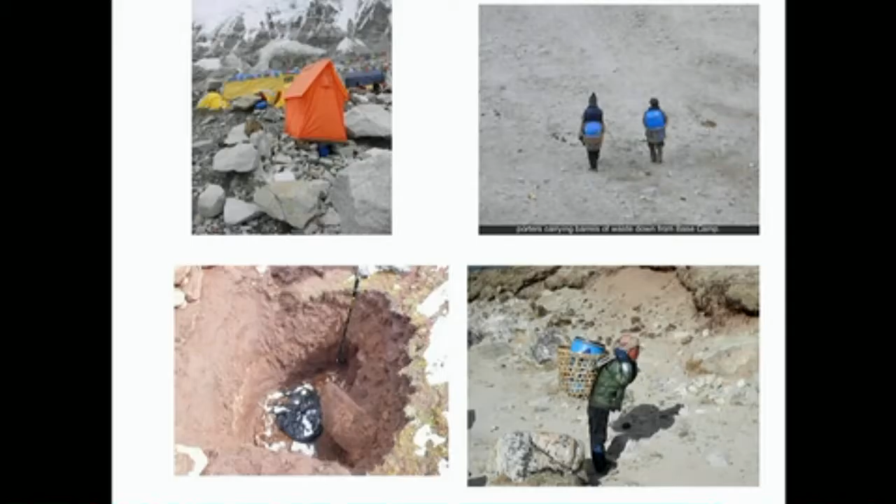unlined pits at Gorak Shep. You can see the ski pole for size, and when it fills up, they cover it up and move on. They've now gotten to the point that they've filled up the space at Gorak Shep. They have no more room, so they move below Gorak Shep.

And it stinks. It will slowly, particularly the human waste, dehydrate because of the cold, so it will shrink. And in those pits I showed you earlier, the dirt falls in, and the yaks can step into it because they're depressed areas.

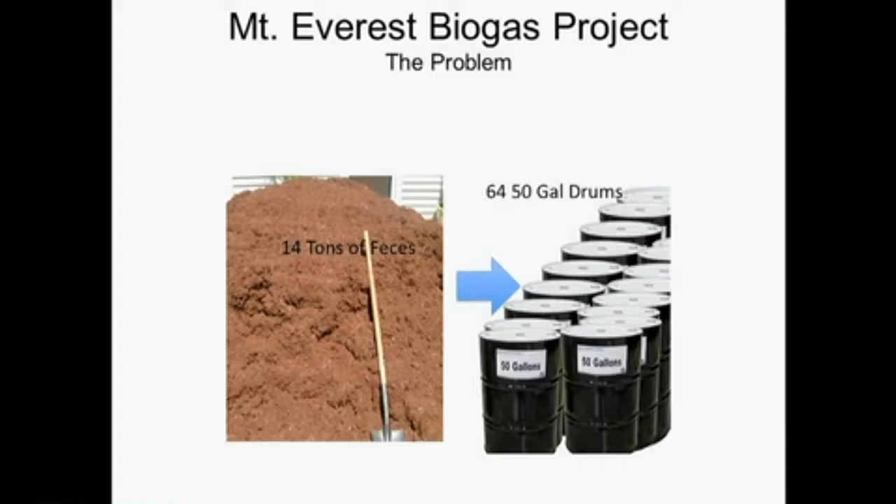So to give you a feel, I can't get my arms, and I don't want to get my arms around 14 tons of human waste every year. 12,000 kilos of human solid waste, not urine, is carried down from base camp and dumped, and that's about 14 tons, so just visualize what that is. I converted that into, that's the equivalent every year of 64 50-gallon barrels. And if you stacked them on top of each other, it'd reach 165 feet in the air.

Another gee whiz, if you fill a room 8 by 8 by 7, I don't even want to visualize a room full of poop, but that's what we're doing. The equivalent of 64 barrels.

So, who are we? And this thing really started. Dan Mazur is a co-founder with me of this. Some of you may know him. He reached notoriety, not that he planned it, in 2006 when he was guiding. He's been guiding in Nepal and Tibet for about 20 years.

He was guiding a group from the Tibetan side on Summit Day, and they come across a guy by the name of Lincoln Hall, an Australian, who had been left for dead and passed up. He was still alive. They gave up their summit attempt and rescued him. Lincoln Hall survived, and that's the kind of guy Dan is.

Dan lives half of his life, 6 months a year, in Nepal. He was very knowledgeable about biogas digesters in Nepal. There's 300,000 biogas digesters in Nepal, I'll show you in the next chart what one looks like. 300,000 of them in Nepal, and their goal is to install 26,000 more a year.

So I'm going to spend just a few seconds on this. This is a typical biogas digester. Some of you may have seen them. They're basically buried in the ground. Biogas Sector Partnership or Program is a company in Nepal. It's an NGO. They are, in essence, the clearinghouse for all biogas implementation in Nepal.

And like I say, there's 300,000 of them already running in Nepal, so they're key to this. This is their 6 cubic meter design. They make one 4, 6, 8, 10, 12 — they have an off-the-shelf design. This is not the technical problem, it exists. It's technical arrogance on our part to think we should go to Gorak Shep and design a better biogas digester. This works, so we say we're going to take it off the shelf. That reduces our risk, and they know how to build them.

So what you do with a digester, you have a mixing station. You take kitchen waste, farm waste, animal waste, human waste, you mix it with water, usually 1-to-1. You slide it into the digester, and the digester is kept warm. It likes to be at about 20 to 30 degrees. It's an anaerobic process, there's no air. There's 3 types of bacteria in there that basically break the waste down, and they produce methane gas, which you can use for cooking or lighting.

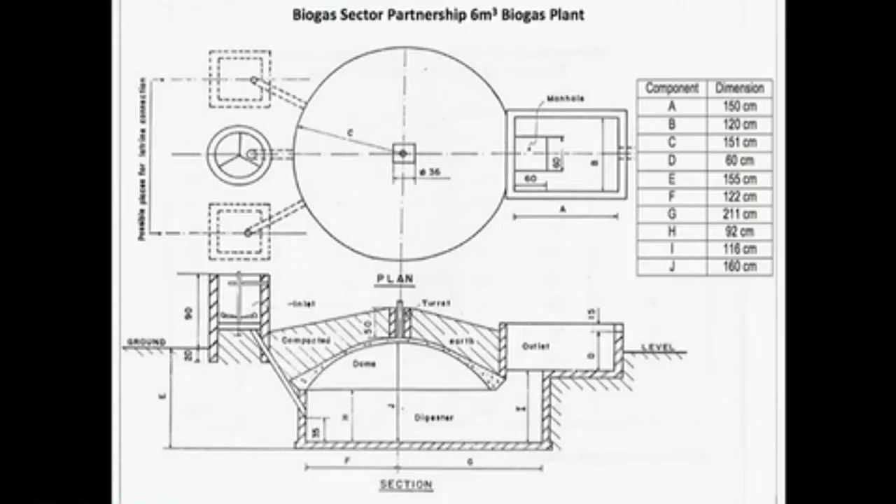And the other thing they produce is an effluent that when it's pushed out, as you add more in, it pushes out over here. The outlet is an effluent that's fertilizer. I won't say it's pathogen-free because that's a difficult definition, but it's a fertilizer that you can use on crops. Where they've run academic tests on that fertilizer versus bought fertilizer, it's anywhere from 6 to 20% more efficient in production of crops than what you can buy. And it's free, and it comes from human waste.

So coming out of the outlet is the effluent fertilizer. Coming out of the dome then is the gas. The gas collects on the dome under pressure, and you bleed off the methane gas or the biogas for use in lighting and cooking. It's used all over Nepal. So it's buried in the ground. And the only modifications we're going to make to that design is we're going to have to turn it into a thermos bottle because of the cold ground at Gorak Shep, and we're going to have to provide a heating solution.

And that's the technical challenge, has been for 4 years. That's day one: how are you going to keep that thing warm at Gorak Shep, or it'll just become a hole in the ground? So to try to scope this, I said, hey, what's the value of that gas at Gorak Shep?

And again, just from a graphic, I think you love these charts. My 11-year-old grandson made them for me because I couldn't figure it out. So he helped me with this. He thought it's kind of cool.

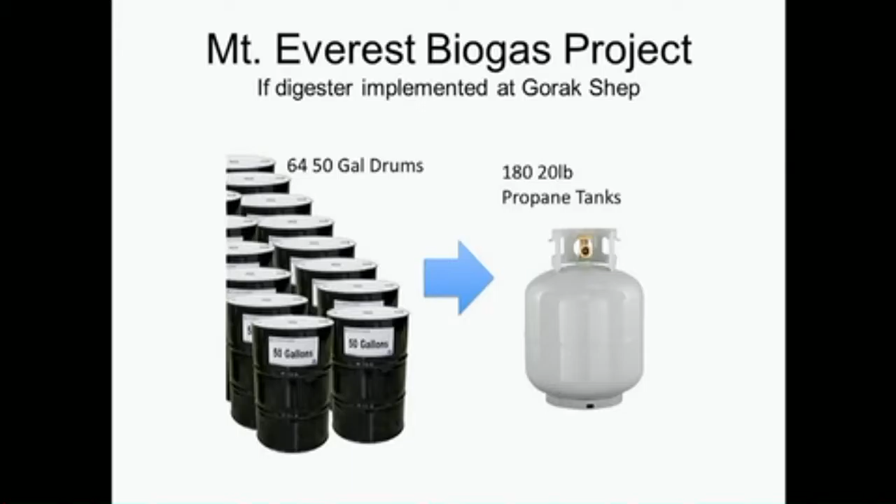If you took those 64 50-gallon drums and you took the gas that it produces every day — you feed it every day, and it produces gas every day — if you took that human waste, processed it inside that digester, it would produce the equivalent in terms of heating. We're not producing propane tanks, we're not pressurizing. It would produce the equivalent heating value of about half of what we call a barbecue propane tank a day. That's a lot of gas. Now, it would be better if we were using animal waste, but we don't have animal waste there, we have human waste.

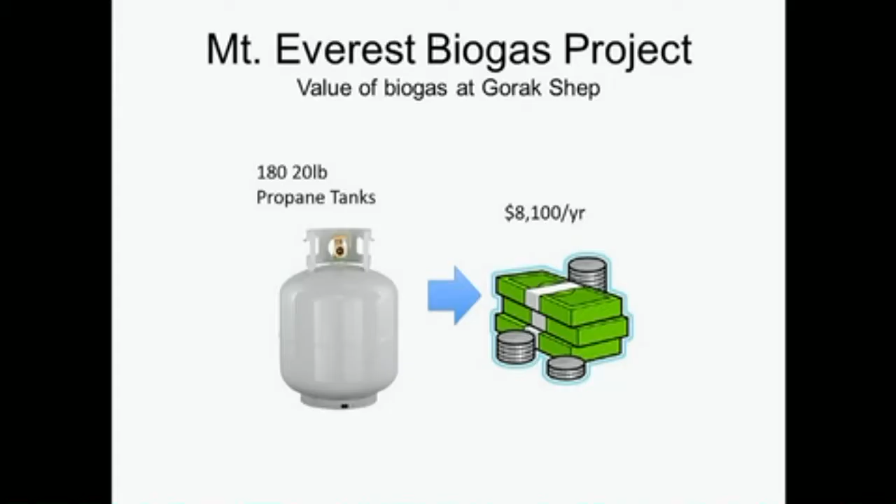And what's the value of 180 20-pound barbecue tanks at Gorak Shep? So we asked, what's the cost of a tank at Gorak Shep? And the gas that we produce would be worth about $8,100 a year. That's a lot of money at Gorak Shep. That's economic benefit for doing this, and it's free.

So back to who are we? As said, we're an all-volunteer engineering team. Nobody makes a dime, we're doing this. They all have real life, jobs and families and hobbies, but yet they donate time to this project because they like it.

I won't go through all those affiliations other than to say we're not a couple of wild-eyed engineers in Seattle. We are very closely affiliated with Engineers Without Borders in Seattle. In fact, they're the source of most of our engineers that come in and volunteer to work a couple hours, a couple weeks, a couple months to help us on the technical aspects of this design.

We're also aligned with Architects Without Borders, and I'll talk about them because one of the conclusions we've come to is we have to have a shelter over the digester to control the atmospheric temperature over the buried digester. We've got faculty members from the University of Washington, Seattle University. We're forming an alliance with an outfit called Living Earth Institute, who has water and sanitation projects in remote areas of Nepal, and they've been very successful, so we can learn a lot about how to implement this.

Center for Urban Waters, I brought that up earlier. They've done some water testing for us. Again, a bunch of bright PhDs that when we take a question to them, they say, hey, we've run water samples at Gorak Shep, and the water sources there are contaminated, but you can't say it's because of the blue barrel waste. There's no association. So they've helped us by saying they'll run additional tests on that water, looking at ingredients that can only be found in humans. Now you can start making a correlation between contamination and whether humans, in their feces or urine, are part of that.

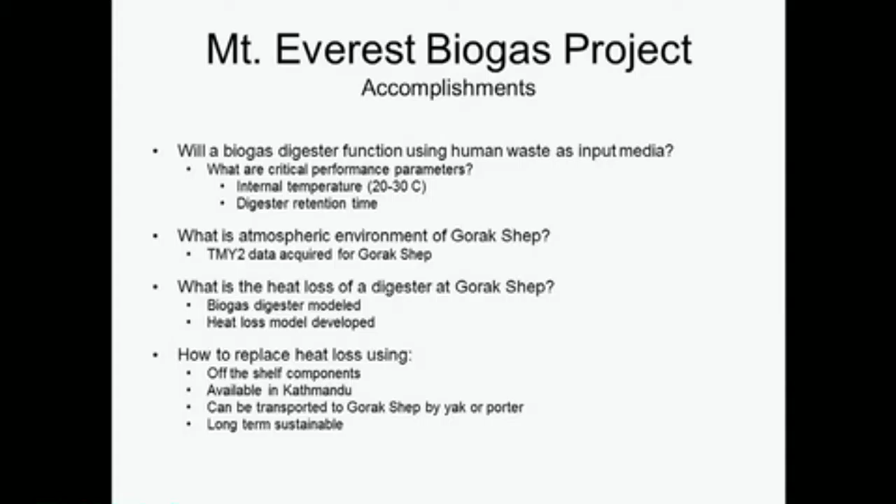The second thing is you want to retain the digester retention time. You want about 70 to 90 days, so you're basically cooking the pathogens before you push them out the other side. So those are the two parameters. The sizing of the digester reflects those parameters, but you got to keep it warm. That's the technical challenge.

Now I'll digress for a second. After we got into this, people asked me, were you and Dan drinking when you took this project on? And I think they looked for yes, because that would find some rationale for why we took this on. But the answer was no. We were sober, but it's a tough technical challenge. But we're winning it, we're winning it.

So from an engineering standpoint, you walk down the engineering thought process. Okay, heat's a big problem, we got to keep that thing warm. So what's the environment at Gorak Shep? You got to know that. What's it like up there?

So we went and acquired something called TMY2 data. It's available to anybody if you ask right. It's the typical meteorological year, and it's actually an accumulation of about 30 years of data at Gorak Shep, or anywhere in the world. It says, what do you think the temperature is going to be like on January the 7th, and ground temperature, air temperature, wind? So there's a database. It's huge, but there's a database for Gorak Shep.

So these are some of the design conclusions. It will require shelter over the digester. That's why we were aligning ourselves with Architects Without Borders - they will help us design a shelter over the digester using local materials, local labor, and everything has to be transportable up to Gorak Shep.

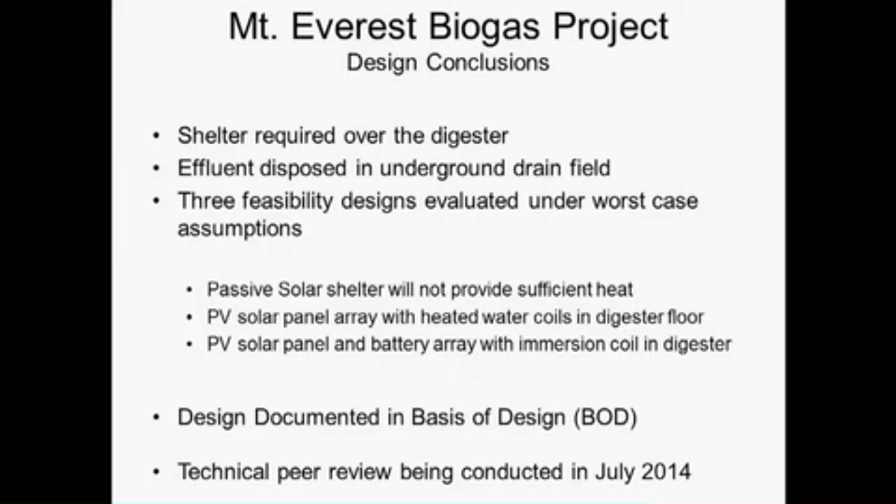I also laid on the engineers: forget about helicopters. You're not helicoptering equipment in until you prove to me you can't do it by bringing it in by man. The other thing is the effluent, the fertilizer. When you look at pictures of Gorak Shep, there's nothing to fertilize up there, there's rocks. So the effluent will be disposed of in a normal septic tank drain field kind of configuration, because we're building on a lake bed. That will ultimately change if you moved into a warmer environment where there is something to fertilize. I think that's probably the gold of this whole system, the fertilizer, but it's going to have to be demonstrated.

We looked at 3 feasibility designs, all evaluated under the worst case conditions at Gorak Shep according to TMY2 data. You've got to design to meet the worst, and since we're using PV panels, you've got to allow that there'll be a period of time with little or no solar energy. So everything we've got in there is conservative at this point. I'm okay with that - if we have a baseline, we can start whittling away at some of the assumptions. But it's been hard to get a baseline.

The other thing we looked at was whether we could provide the heat loss with a passive solar shelter over it, and the answer is no - you've just got too much heat loss in that cold environment, so you're going to have a heating system. So we looked at a PV solar panel array with heated coils in the digester floor. That was the design we took to Gorak Shep in 2013.

I personally think it may still come back. I personally think it's the best solution, but BSP didn't like it. They were concerned that if any of those coils broke in the floor, how would you replace them? But it is a really simple design.

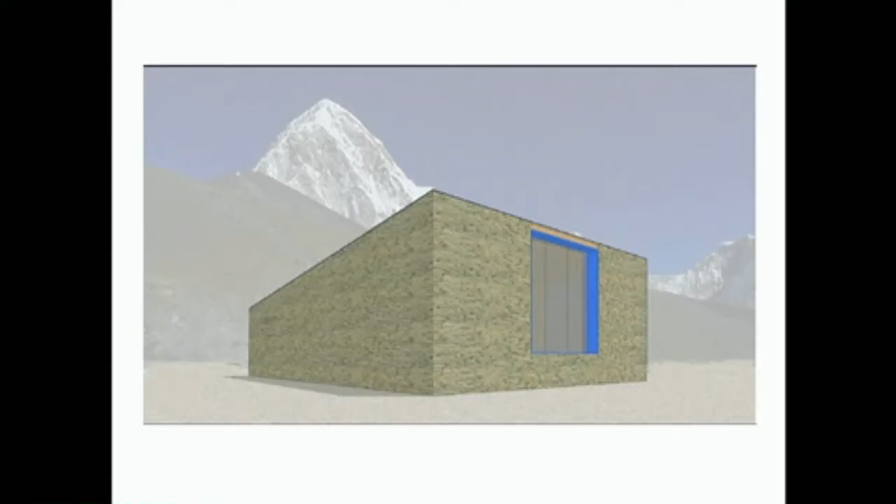So I've got some quick - this artist concept, not a very pretty shelter. It's made out of local material. The artist in Seattle really didn't know what kind of local material there is at Gorak Shep, but I'll accept it - it looks like it's made in Mesa, Arizona. But it's about a 7 by 7 foot structure, nothing fancy.

Big window in it because we'll try to get as much solar energy inside the shelter during the day, then night shades at night to try to retain the heat inside the digester. This is a plan view of it, just showing what's inside.

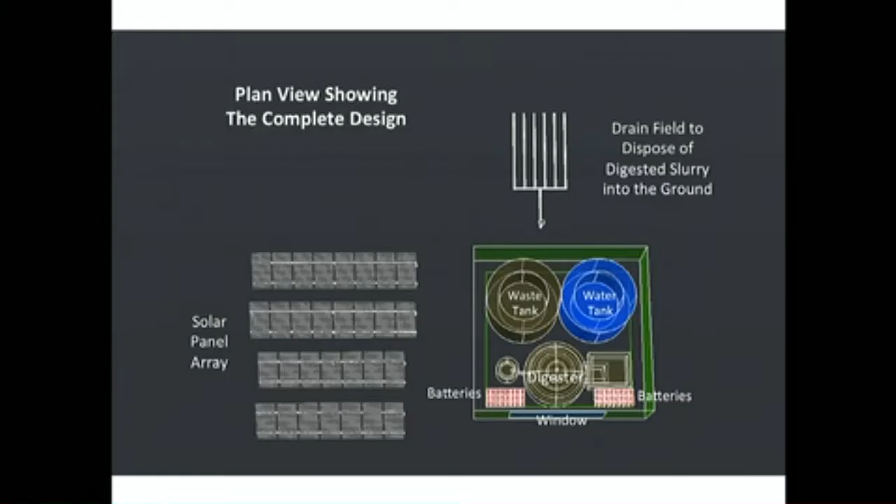That's the layout: two tanks, digester in the ground, battery array, solar array outside, and then a drain field for the effluent.

Okay, I'm getting close, I don't know where I'm at on time. Anyway, getting close. The last thing I wanted to talk about was: can you implement it?

That's the one that really matters, engineers can design it, but implementing something like this at Gorak Shep, where we have no expertise in our engineering group.

So we've got a 3-phase program. Again, we're not a business. First phase, we're going to construct the biogas system at Gorak Shep. We're going to hire and train 2 local Gorak Shep people to operate it, because they've got to feed it every day.